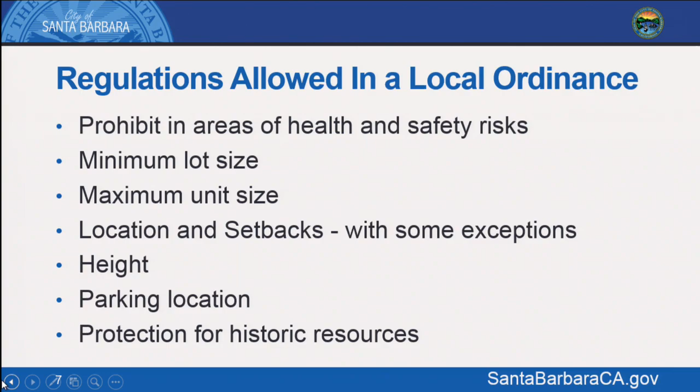Table 2 in your memo lists some of the provisions we're considering at this time for the draft ordinance. Like I said, it's still a draft. These are things we're considering as staff and getting public input on, and eventually we'll come up with a recommendation for the Planning Commission.

As I mentioned earlier, the high fire hazard area prohibition is supported by housing element policy, so that's one of the things we're considering. We're also looking at maybe a prohibition on building sites with slopes of 30% or greater, although most of those are already in the high fire hazard area.

We're proposing a minimum lot size of 5,000 square feet and a maximum unit size of 600 square feet. We're taking input on that and are open to other sizes. We're also recommending that accessory dwelling units count towards the maximum FAR on a lot.

As far as location goes, we're considering prohibiting detached ADUs in the front yard, except when it's a conversion of, say, an existing legally permitted garage. Setbacks of the unit would comply with existing setback standards.

For parking, we're considering prohibiting uncovered parking in the front setback and front yard unless it's adequately screened. For protection of historic resources, we're researching what types of resources can be considered, whether designated landmarks, something on the potential resources list, or a historic or landmark district. We still need input on that from legal staff, but that's one of the things we're looking into.

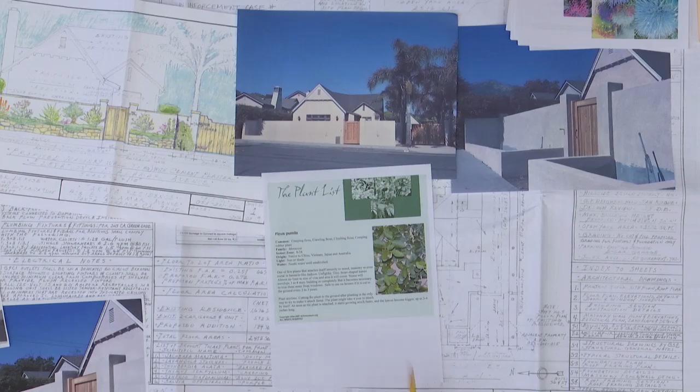Okay, and then just to be clear, is this hedge at 8 feet or 12 feet? About 9 feet, okay, and then 2 feet wider. The hedge law allows it to go to 12 with approval from staff to go above 8.

Okay, Brian, just so we hear your side of the story. When Denise was reviewing it, she felt pretty strongly, and I agreed with her at the time, that it probably was a good idea to cut it down because it was an unusual situation. But that was the feeling of our board, so she's come before the full board, and she'd like to hear the full board's comment about that.

Is there a wall behind it, a new wall that's supporting the end of this wall? Further back here, is there a fence or wall? There is a new wall that this wall is supported by. I guess I don't understand what you're saying, going this way. Yes, it's a fence there, not a wall.

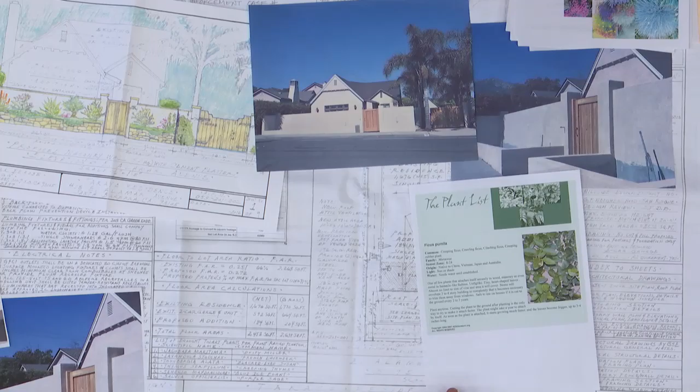Right, okay. All right, before we get too far along, is there anyone in the audience wishing to address this project? Seeing none, Chair will close public comment and bring it back to the board for final discussion.

Who has comments? If you are going to go with a vine option, I would choose the Ficus pumila.

And I disagree. I don't think the wall should be cut down. And I'd support leaving it with the screening. Any other comments? I think the wall...

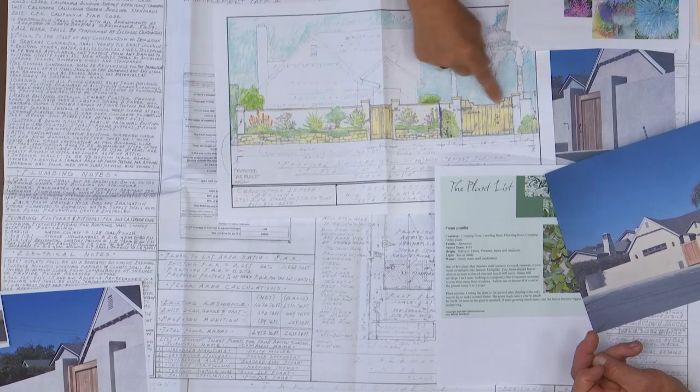One way, I could accept the wall if it was totally screened, but this picture makes it look like it's stopped. It's not finished yet, but it's going to be. Nothing in the plans, right? The whole violation and trying to overturn the violation stopped the project, because I wanted to make sure we knew what we were doing there before we started planting and filling it. But it will be filled, and I'm happy to do a vine if that's what you're asking.

Yeah, I'm on the fence, I haven't stepped over yet. I won't step over. Just so you know, the two houses facing me have huge hedges too, so nobody even looks at me. Okay, any other comments?

I'd like to see it screened. I'd like to see it screened if it stays.

Mr. Chair, I forgot to mention that the actual gates were slightly constructed differently than the approved plans. They were more decorative instead of straight across. So that would be something you would also weigh in on, whether that's an acceptable change, the way they were simplified versus the plans. There's still a double gate, plans to put the cap on, I believe. Yeah.

So what's missing is the treatment on the gates, the way they were shown. There's a cap going on that hasn't been done yet. Once that's done, it's going to be softer and look better when it's all planted, but I just didn't do any more once I had this going on.

I grew up two blocks from here, and all those houses are changing drastically, all the way down the street. Most of Alomar's are hedges, but it's changing, and there's only one house that's still there that hasn't changed at all.

Kind of an Alomar question, and Cuesta del Sol. Richard, or Robert, excuse me - it looks like in your drawing of the front of the building, you're showing a stone finish on the lower wall. Is that going to be finished that way? Yes, with fascia - it's going to be like veneer.

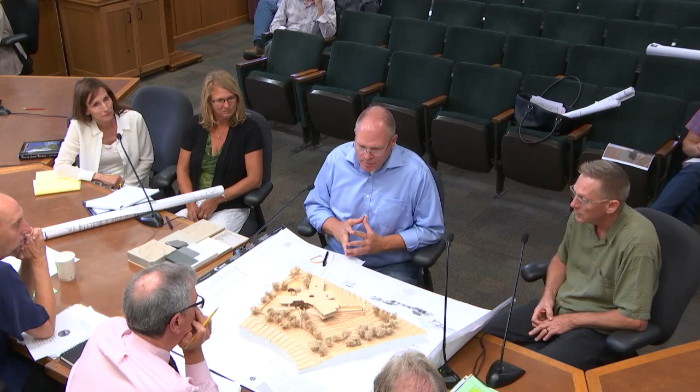The statistics, the project, and the design—maybe we could bring the model out first. This is the model that we showed you the first time, and in large part it's exactly the way we showed you last time. That doesn't always happen, but in this case we did a lot of preliminary work to make sure we were on the right track, and that paid off. I think we'll show you we're pretty close to where we were with the original project.

The FAR was listed as 168. It's actually 164. We haven't increased the floor area—the first floor level is the same as last time, the part that you can really see. The basement has increased about, I think, 150 square feet, and that was working with the structural engineer, who wanted to align some walls that we didn't have aligned previously. But that increase isn't really visible; it's beneath the grade. Maybe we'll start going through the plans.

Am I going at the right pace? Yeah, keep going. These plans are a little large. That's what I tried to avoid, just couldn't.

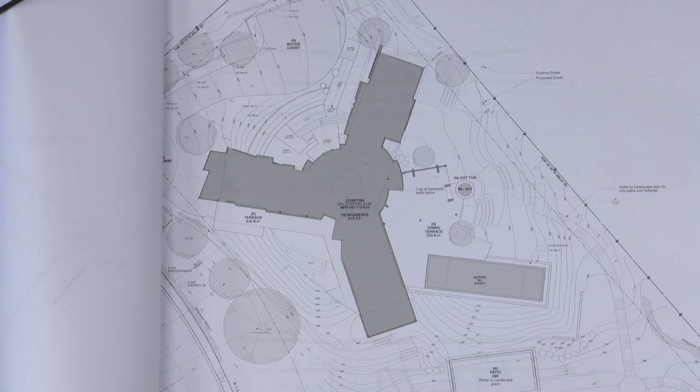Probably the most significant change to the architectural proposal was the grading. What we had before was balanced grading of, I think, 2,104 cubic yards. Since that time, we've met in more detail with the fire department, working with them to create a safer driveway grade than what is existing out there now. We were required to do more grading in this area, so the grading has increased due to that. Also, our original fill calculations were a little reduced when we had the civil engineer really look at it closely.

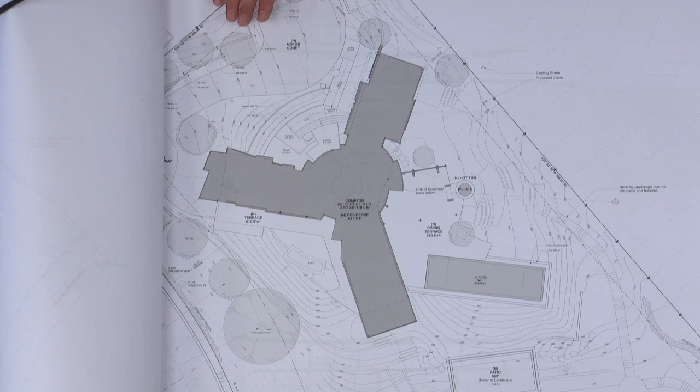So right now, whereas before we were balanced on site, now we're proposing to export an excess of cut of 1,488 cubic yards. We can also work to put more of that on the site, but our concern is if we keep putting on the site, we're actually changing the natural contours and making some slopes steeper than they are naturally.

So our feeling is it's better to export, since we've got a nice balance here now. That's that. The building heights are well below the required maximum height, with the exception of just a couple of areas at one end, where the floor below is exposed at the garage and at the workshop.

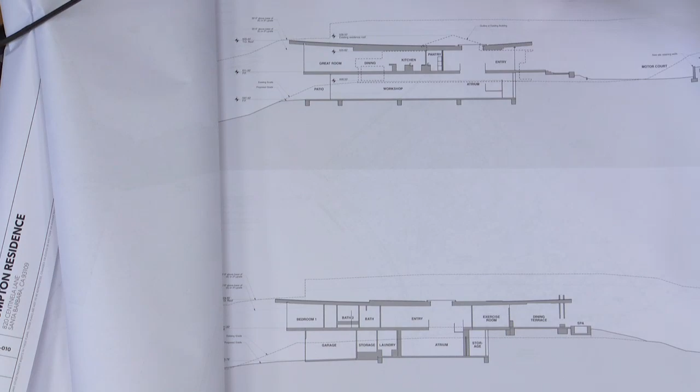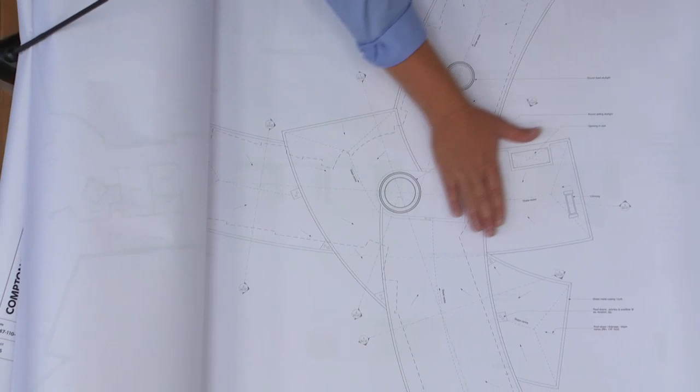In working with the structural engineer, we increased the height of the roof a foot in these areas. Going to the roof plan: the building has roofs that curve up on the ends, and these ends increased by a foot. This roof facing east, which isn't visible from the street or anywhere, we increased 2 feet because when we modeled it in the computer, it was blocking some views of the mountains and the city. But in general, we're very close to where we were last time with the roof heights.

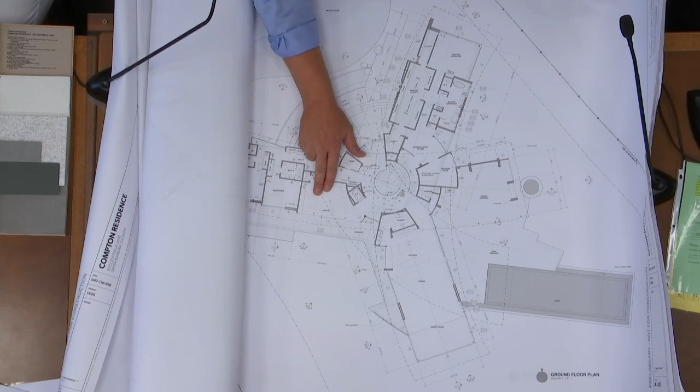The floor plan hasn't changed. The one change we made is before there was a third bedroom here, and we ended up making the office a little larger and taking that bedroom out. But other than that, it's basically the same plan, with a living wing to the south, a master bedroom wing to the east, and the office bedroom wing to the west.

And then the elevations. The materials we're proposing are consistent with what we talked about last time, now with actual samples here. The exterior palette is pretty simple: stone, plaster, and glass. For the stone, we're using a natural tan-colored limestone that's similar in color to sandstone.

We're exploring different textures and finishes, including a more rustic natural texture surface, a raked texture, and then more of a honed finish, but it's all natural stone. Right now we're indicating the stone on the elevations.

We're thinking the base of the building, for the portions exposed on the lower floor, would likely have more of a rustic finish, whereas the walls up above would have more of a refined finish, but we're exploring different ideas. Basically this material. The eaves of the roof are basically the same material as the ceiling.

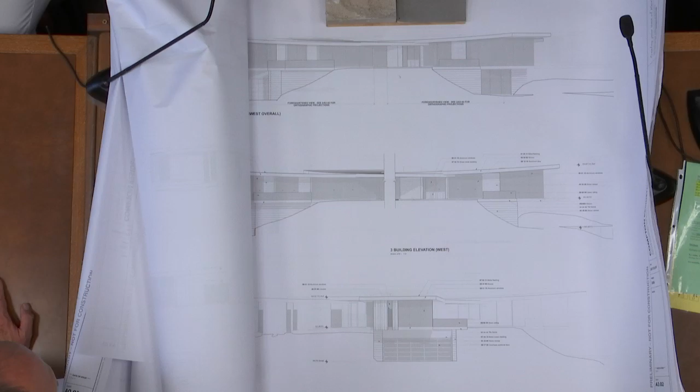So the ceiling comes horizontally and then returns up the eaves, and then we'll have a very minimal metal roof edge, this zinc metal color. We'll also use this zinc metal material for the metal walls, and what we're proposing is a vertical varied pattern. Then for the doors and windows, using a darker gray.

And for the site walls along the driveway, using a darker gray plaster color, which we think will help them visually recede and also provide a nice backdrop for Stacy's landscape. And then the decks, the floor surfaces, would be this white gray color granite.

I just realized two things: one, for the infinity pool edge, which has to be underwater, we're going to use this bluestone limestone, which is a dark gray that matches the color of the metal. And we forgot to put the roofing material on here, but it would be a gray color similar to these, and a cool roof.

Yeah, these are the elevations here, which are very similar to what we had shown you last time.

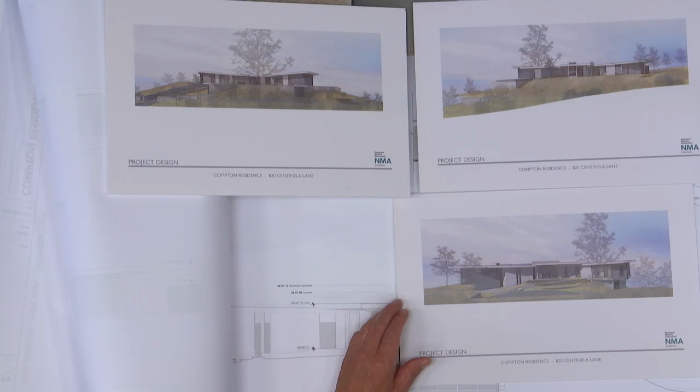Grab the existing ones we showed last time. So last time around, this is what we had. What about the plate heights? Let me go to the sections and I'll show you. Let's see those first. That's the original north elevation, so that's that elevation. Okay, back to the sections.

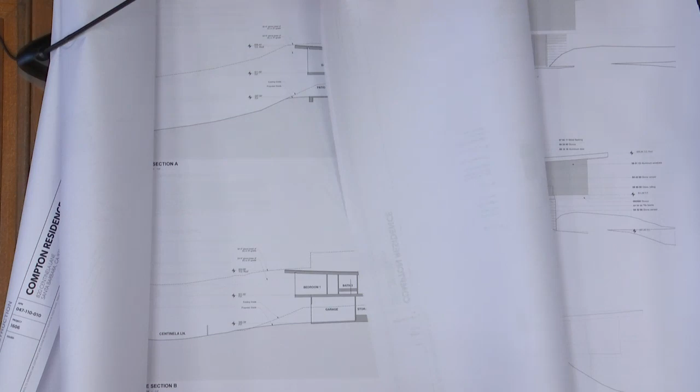These are the heights. I guess if you want to see plate heights, they're probably on the sections. Yeah, I think we should just have proper roof labels for the plate heights. Okay, these ones actually show you better what the heights are. So here we're at 11.6. At the end of the great room, we're at 13. So your workshop is 12 feet high in plate height.

Okay, anything else you need to present? Landscape plan. One question, just a quick one.

Where's the front door? I know I looked at this before and seconded it, but it's easy to lose in the model. Show me on the floor plan, and where the pool is compared to it. Pool is here, the motor court is here, and this is the entry here. We're looking at a front pathway that ramps up. Front door is right here.

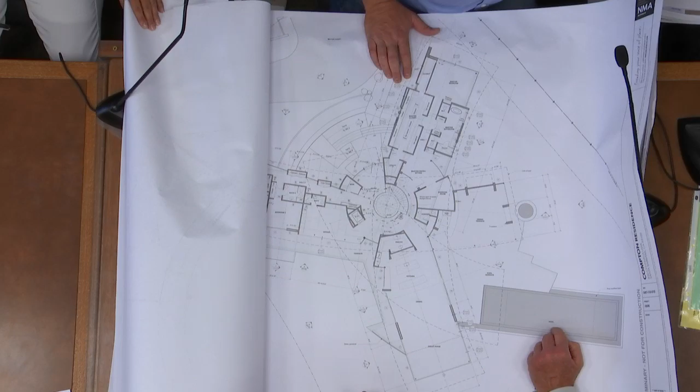Is this the living room wing? No, here - that's the master bedroom. And this is the roof that we increased by 2 feet here, where it bends out to push the fireplace out. Yeah, this model hasn't been updated to the new plans - this is what we originally showed you.

Thank you. Okay, landscape plan.

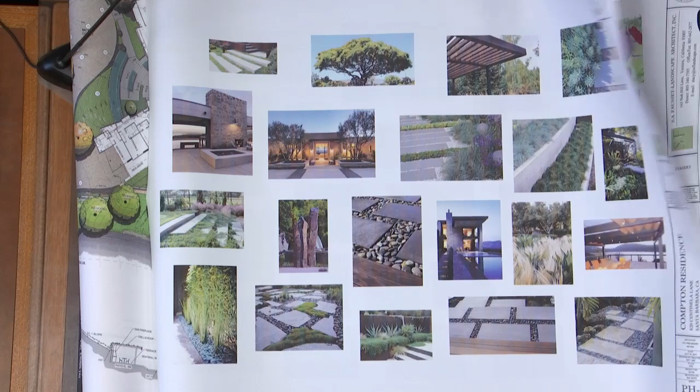A combination of stone, pebbles, other types of rock, simple landscape combinations of plantings, some vertical stone elements possibly for accent, and a plant palette using natives and drought-tolerant plant material, being sensitive to the water situation, obviously.

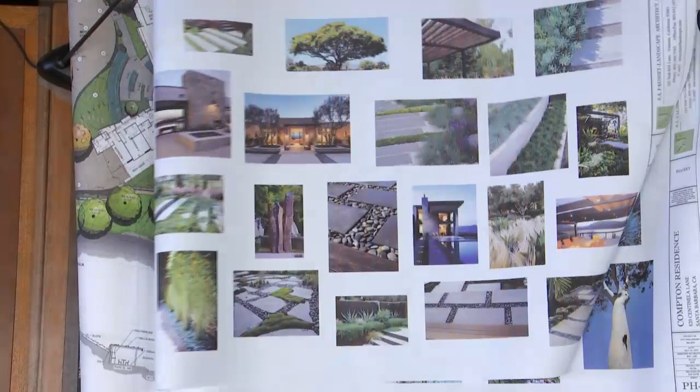There's an existing eucalyptus tree that's prominent on the site - there it is. We're not adding the eucalyptus tree. There are several oak trees on the site that we're going to relocate, and we have an arborist letter submitted for viability, as well as 4 mature olive trees that will also be relocated.

This is the driveway coming up, the motor court at this area. The existing oak trees are located here and here currently. They're fairly young and viable, so we're going to move them to this location. There's an existing city building up in this area that's not very attractive, so we'll use them for screening that a bit, as well as some native plantings along the property line there.

Coming up to the motor court here, some sweeping walls - this blue color indicates more of a grass or succulent planting used in mass, so it's more simplistic. These 3 trees would be sculptural type trees.

We're considering sycamores, a Tipuana tipu tree that's more sculptural, and Melaleuca has also come up, as have olive trees, but that's probably on the fringe because of its messiness. Melaleuca is on the OK tree list - the list of trees has changed over the years, I know. With Melaleuca, which one - quinquenervia or linarifolia? Either one of those?

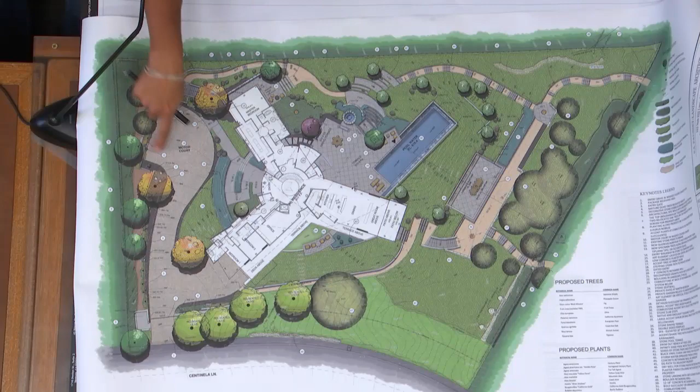Accent tree at the entry here. We have a more private entrance to the property used for circulating around the property and/or maintenance, so there's a gated area at this location, more of a DG with stone step walkways coming down here.

There's a private master bedroom patio off the master bedroom, with views out in this direction as well as all these directions. So more of a private garden in this location that relates to the master bedroom. Off the main terrace, there's the infinity pool - we're able to minimize the grading in this area.

Spa at this location - we're probably going to change this to more of a square spa that steps down and gets more naturalistic as it moves away from the house in these areas. Walking down in this direction, there's views out this way - not a lot of trees because we don't want to block the great views from the property.

So DG gravel material down into this area. We've tucked a covered patio in here, probably with a trellis of some sort that'll have vines and/or awning type shading provided. It's tucked back into the hillside at this location, but there's great views out this direction and this direction.

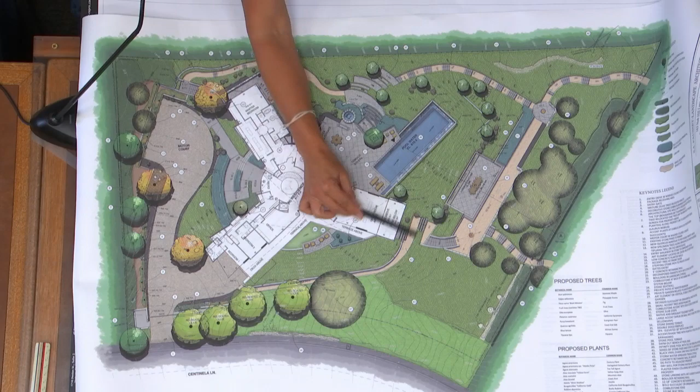Up at the house level, there's a great sunset view from here, so a tiny little patch of lawn at this area with a sunset patio, and then a pathway that circulates back, mostly for utility purposes and circulation.

All of this is more just slope planting and naturalistic. A few of these little elements are for stormwater retention on site that we've been working with the civil engineer on. So the equipment's tucked down.

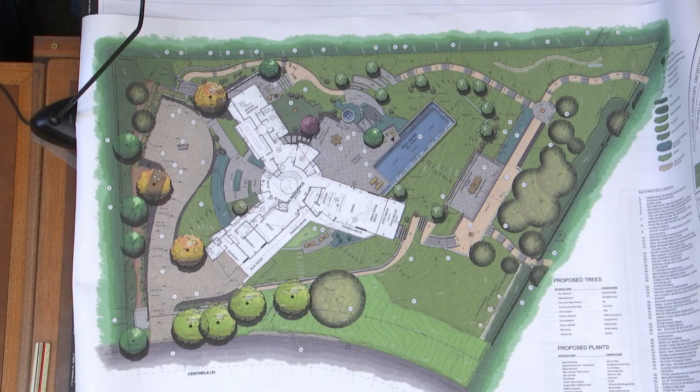Anything else? That's it. There's a little section down there that shows where this sits. The ocean's out here, okay. Oh, and the preliminary plant list is on here.

Before we go to questions and comments from the board, is there anyone in the audience wishing to address this project? Seeing no one come forward, the chair will close public comment and bring it back to the board for questions.

Fred, I have a question. You helped design this building, right, that we're sitting in? My question is, do you know what the plate height of this room is? Plate height of this room is 12 feet. Thank you.

Other questions? Questions for landscaping? Can I ask those right now? Sure.

I'm curious about the Acer palmatum. You've got this drought-tolerant, native-ish landscape going, and I don't see where that would fit in. We like the sculptural quality and the contrast. Another option is the Cercis canadensis, which has the purple leaf. But you can see this dashed line here is the overhang, that sweeping roof, so it would be in full shade here. So we were just toying between the two, liking the sculptural quality of the Acer, but understanding that it might be better suited as a Cercis.

Okay, other questions? No, not right now. I have just a few. One of the comments we made last time was the lighthouse effect of all the glass. Did you address that, or did I miss that? Yes, I'm glad you brought that up. I forgot to mention that.

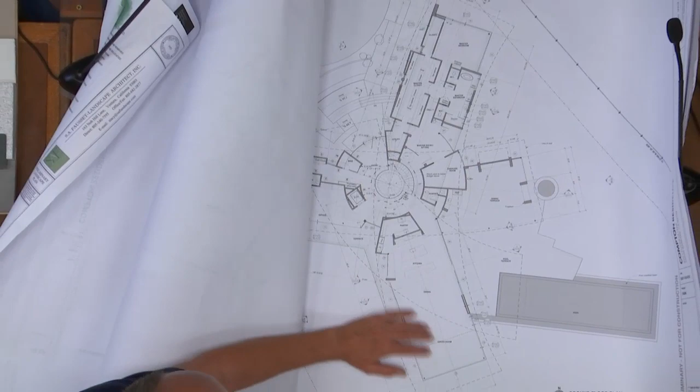But the other comment too, if you look at your floor plan, I don't know, there is an opportunity, and I'm speaking in the spirit of Bernie, there could be a little bit of reduction too. I think some of the square footage is extremely large. If you wanted to lower your FAR, but that's my comment. The rest of the board members may feel otherwise, but I think there can be a little reduction. These are very large rooms.

And it's with these styled homes. Yes, people are not neutral about the style—they either really love it or they hate it. I usually find out at Christmas parties. But just information for you to take into account while developing the design work: I think the big issue for this one is the amount of cut and fill, especially the cut. Fred has a very valid concern with regard to that. So those are my comments.

Playing off what Brian said, I think it's really important in this project and all the others you'll be reviewing to relate it to the guidelines. Your comments and questions should be geared towards how the project complies with our guidelines, and it also helps direct the applicant on how they can move forward. If you can keep that in mind, thank you. I don't like it, but it meets my guidelines.

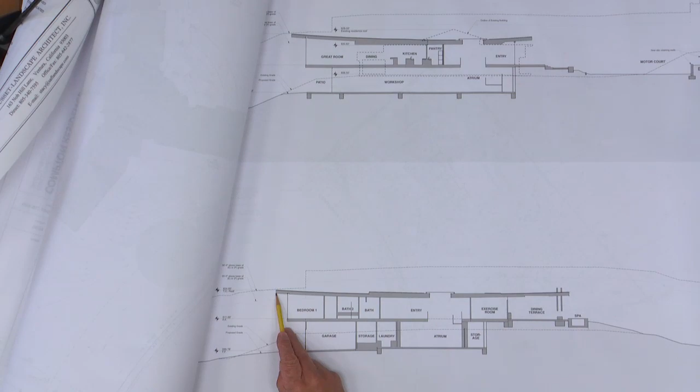So this went from about 12 inches to 16, 18 inches? 20 inches. So it gives the illusion of more of a slope up then? No, actually the opposite now—we've flattened it, but it's gotten thicker because of the structure. Structurally, it had to get thicker rather than a thinner profile.

May I briefly respond to some of the comments? First of all, I hear you loud and clear on the grading, and we'll focus on that. To be honest, it was a little bit of a surprise, but grading is notoriously hard to calculate anyway, especially with the fire department involved. So what I'm hearing is we really need to go back to the drawing board and balance size and site and reduce the grading—we'll take a hard look at that. Great.

Design-wise, I serve on the Montecito Board of Architectural Review. I've gone to—same there, Christmas parties. Believe you me, when you're doing something unique like this, if I've done 10 of these I could just say, well, go look at the other one. But we haven't—it's very unique. And so people do get concerned about that.

From my perspective, I think we've been very sensitive to the site. Although this is a site where you can see it, it's mostly from a distance. The building itself appears, for all intents and purposes, as a single-story structure. We have a lot of landscape screening, and it's not really directly viewed from the neighborhood. So I feel like we've done a good job with the mass, bulk, and scale.

Also, I think sometimes when people see curved roofs, they think 'wedge' or 'flying saucer.' But I really think this is a very subtle curve, and it doesn't have that feeling. From ground level, it's really going to appear to just be a very gentle curve. So I wouldn't want you to think this is exaggerated—I know there are butterfly roofs and things that are really an exaggerated architectural statement. That's not our intent at all on this project.

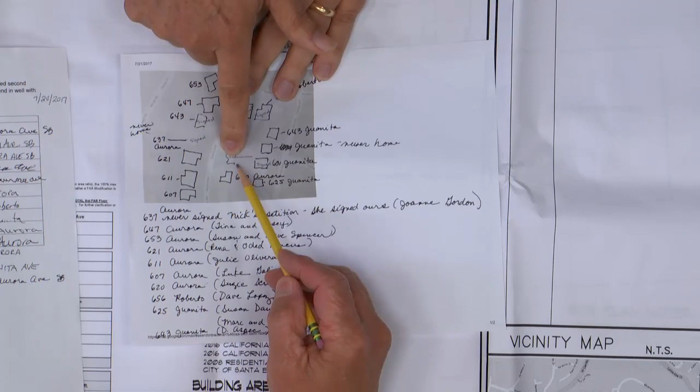So that's these guys that have addresses? Yeah, this is the site, right? So that resident, yes or no? Yes, because that's the applicant. This house above it? No, the one above it is the one that's probably going to be here to speak. And the one at the corner? Yes. And the one below it? Yes. And then all these were yes? Yeah. Okay, thank you.

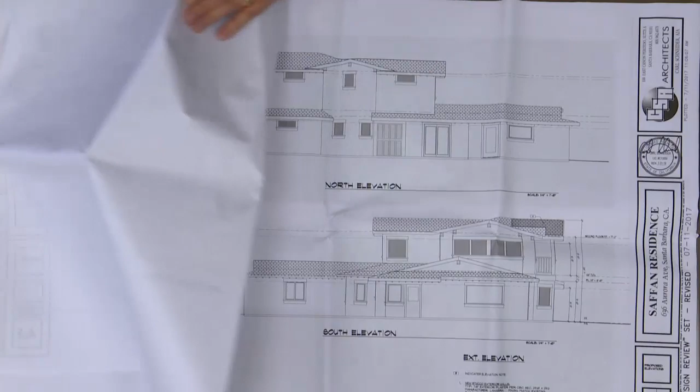And then I'll do that first, I guess. So we talked about the east elevation, I don't have the previous one. This deck is new, because that was a change, one of the changes. So east elevation, and I believe the north elevation, which originally was all one roof, all one plane, so we popped this out slightly, pushed and shoved some things to kind of break that elevation up.

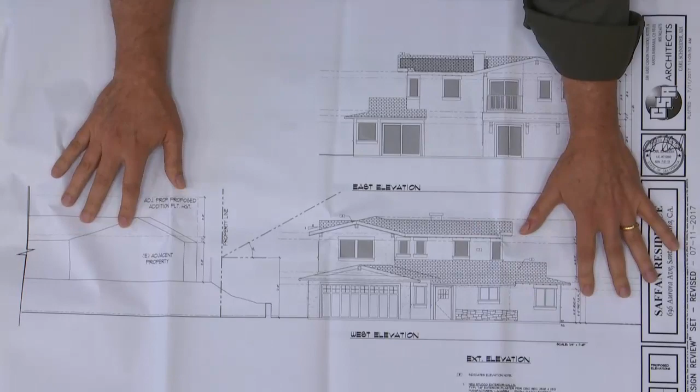That we can look at in floor plan. And then this is just a section to show you relative to what the uphill neighbor's going to see or not see.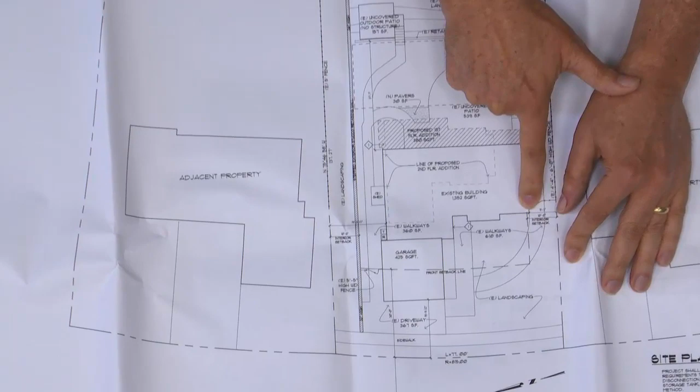Okay, can I look at the second one?

Right, so from a massing standpoint on site, we've tried to pull back to here, keeping soft to the street, soft to the downhill side. And there we have it. Okay, thank you. And that's it for right now.

Okay, so before we go to questions and comments from the board, this is still here for comments because you have not gone to the staff hearing officer yet? Correct, it's not scheduled. Because you need positive comments from us first, correct? Okay, correct.

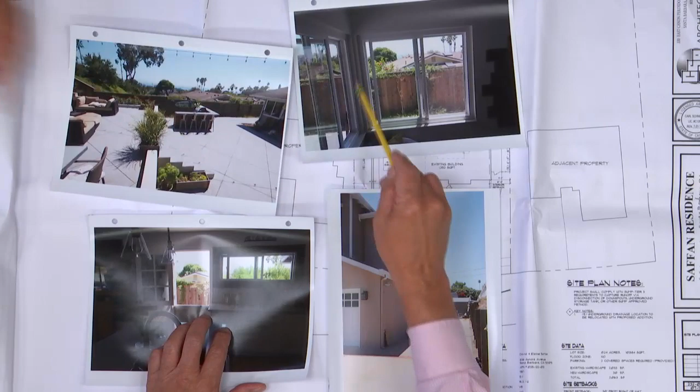Before you leave, though, I want to clearly understand what I'm looking at. So this is from your yard down into the house, correct? So that set of windows is this set of windows here, correct? This is the side, right? Yeah, so I look out the side. Okay, so that window is this window? Yes. So I have two windows that face south. Okay, and then this window is further that way? Yeah. Okay, and where is this taken?

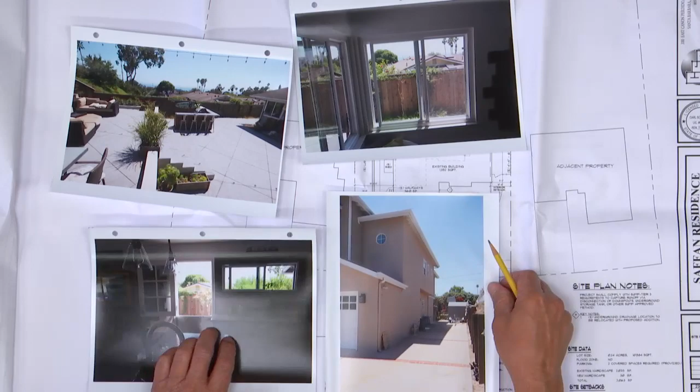Sorry, this is actually what's concerning the neighborhood, because this is another plan that CSA Architecture did that's across the street. This is the house directly across the street, and I think we're concerned that right now it looks somewhat similar to this. Okay, thank you, I just want to make sure we understand where the photographs are taken from.

Okay, next speaker is Joan Coyle. Welcome. Hi. I live at the top of the hill, and we have this beautiful view down the backyard to the ocean.

And we paid a lot of extra money for the view lot. This house is going to block about 50% of the view, not only for my house, but for the houses along the top of Roberto and along Juanita. It will also block—because there's no view this way to the ocean, it's all houses—so the only view we have is down this back swale, and it's a lot of trees, and the ocean is gorgeous.

I think that this does not comply with 3 of those compatibility analysis things. It's really a public view of the ocean. Also, they have a very large front yard. If they would move it forward towards the street instead of into the backyard, that would be avoided. But it wouldn't bother anybody's view, because that's where all the buildings are. And also, all of the houses in that area are 1 story, except for the 2 that they showed with their plan.

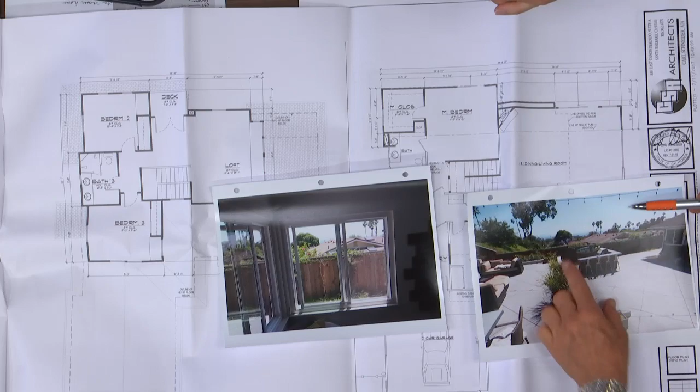And what we're really looking at is a view that we don't know what kind of trees these are, if these are street trees, if they get pruned regularly, and palms are just going to go up and continue to make sticks. That tree you're looking at over there is Susie's tree. It's an olive tree.

Okay, well, let's stop right there. That's not on our property. I made a comment. I want to keep this to questions from the board. Okay, the way this works is we're going to have questions from the board, then we're going to have comments. Then I'll allow the applicant to respond, so make notes of what you'd like to say. Otherwise we're going to get into crosstalk and we don't get anywhere fast.

So you're asking the landscape colleagues your question: don't you think the trees are going to grow up? And I've had questions on what the species is, what the max height is, if the owners prune them, if they're city trees, if the city prunes them. I agree with Lisa - it does depend on the tree and how people choose to maintain their trees, and who knows if those trees are going to be there forever. Somebody might choose to eliminate a pine tree, or it might die one day from pine pitch canker.

I own houses on the Riviera and I own houses downtown and out north of town. Trees just get bigger and bigger. Sometimes neighbors do not prune the top of their trees - they let them grow, and the Riviera has lost views. I mean, at one time there were no trees on that Riviera.

Go ahead and finish your point. Okay, can I make another comment? What we're thinking about here is the fact that some of the neighbors don't want to look at the side of a second-story house rather than blocking their view, because they don't really have - they're looking at a roof here rather than a second-story wall. We asked him to set it back, make it look more interesting instead of having a sheer two-story wall, and he has done this. I'm just making some comments.

So one of the questions I have is about that window right there - what elevation is that? That's the window. Okay, yep. So in theory, that's above a headboard. Correct. Okay, and same thing here - that window's high? And that window's high, okay.

In relationship - one of the things, and Brian, I don't know if you did because I was not here - can you fill me in on whether we conveyed the fact that we're not allowed to guarantee people's private views? My emphasis was that they had a right to build a second story.

It was one of those situations where it's one of these old developments where it's step down, they're all single-story homes, and now they're building second stories. They have a right to the second story, but I emphasize that they visit their neighbors and work it out. I'm trying to get to the site plan. This was Bill and Lucille.

So in relationship to this second floor, is that window we were just talking about right there? More or less. And the window he's showing us in the photograph, in that corner, is in that corner and this corner. Correct. And there's another window which appears to be like over a kitchen sink or something, is right here.

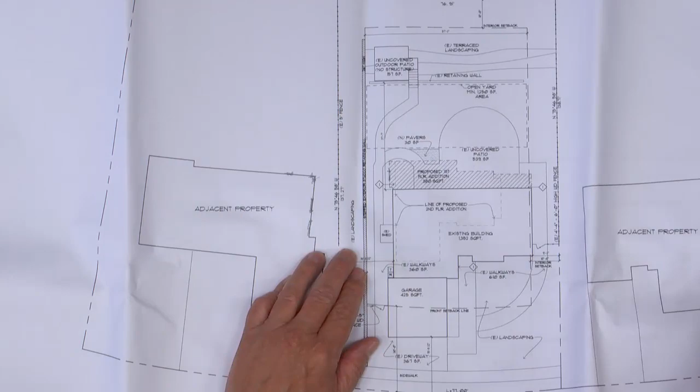And otherwise, out here in the yard, he's looking down, this thing isn't blocking anything. So from his patio, this whole photograph from his patio and his outdoor bar and all that stuff, he's still got an ocean view. Maybe he doesn't have that little piece of ocean view. Okay, so we have this, and then...

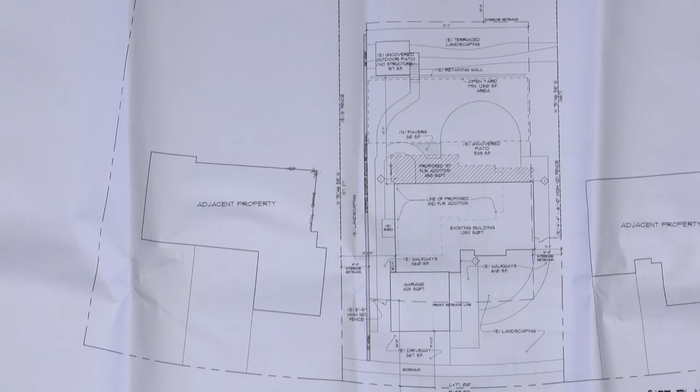The purpose of sitting, this sits over new foundation and new footings, correct? Correct. Second floor, so this is relying on the walls below, correct? What about, that wall, is it relying on a wall below? No, that's kind of up in there. Okay, so this is kind of relying on whatever you structurally have to do to make this all fly. Right. Okay, let's see if I have another question.

And landscaping is basically staying pretty much the same, correct? Correct, because they've just redone it over the last 2 years. And then I noticed that there was a comment about solar panels or something.

One of the things this board has very little say about is solar panels, because it's a state law, so we're fairly limited. But I don't see where you have an exposure to actually put them, if you wanted to, right? Well, by code, we have to, quote, allow for their use someplace. So is that what you're showing? That's what this is. But that's not exactly where they should be, it's not south orientation. Right, but they won't be the most efficient location.

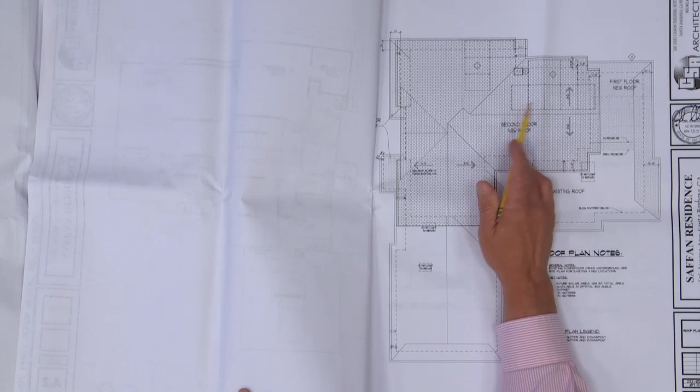Okay, but you have shown them. All right, just so everyone understands, the state of California says any homeowner has the right to put solar panels on the roof, and this board has very little say about where they go or what they look like. We can kind of dictate the color of the frame and a few other things, but pretty much if a person wants to put panels on the roof, we don't have a say.

Okay, I think that's the end of my questions. So do we have any more questions? Okay, so...

You still haven't been to the staff hearing officer. I'm going to make sure I'm correct. Correct. Okay, and did we do positive or negative comments or any comments last time? Yes, on this little sliver? Not in the specific area, so no. Ultimately, the applicant is looking for those comments so they can move on to the staff hearing officer, to get a modification, et cetera. So that's kind of where we are.

Okay, so let's go to comments. There's comments. Anybody? Okay, I want to go back to the floor plan. If nobody has comments, I'm going to move ahead.

You know, I went out there and spent some time this afternoon and walked around, as I've done before, even with the previous applicant who has the home just above this, trying to understand what's going on in the neighborhood. And it's not just the two houses across the street, there's actually a house at the corner that's 2 stories lower down. And as everybody's pointed out, most all of these homes are going to get to 2 floors at some point. We even have an applicant next door that, if he's lucky, will find a way to get that built. So we're going to have to deal with second floors and so forth and so on.

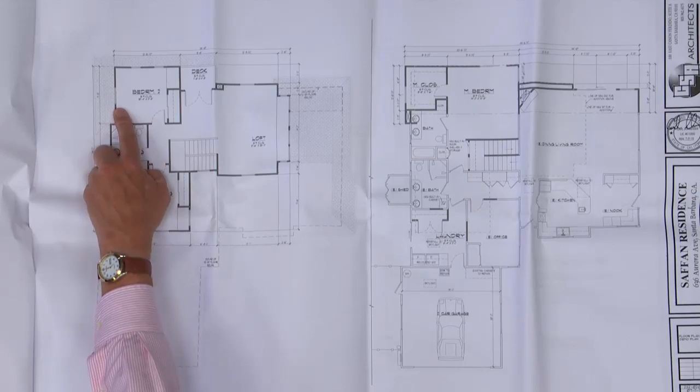So the struggle I have is the privacy issues. And I think to some degree you've solved that by keeping this window high here. That probably at least deals with being able to look in each other's windows. I'm just wondering if you were to make a move here that might get us a little closer and still do exactly what you're trying to do, if you were able to shift this plan.

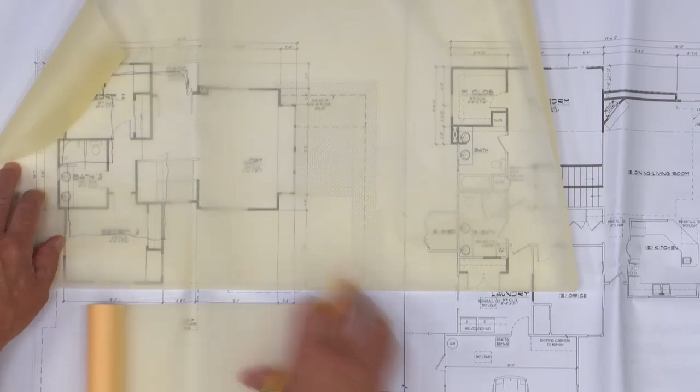See if I can do this. Shift this plan so that—oops, used the paper incorrectly. Shift that plan so that goes like here, and get you a deck here, and moves this other bedroom down here.

That's why I was asking what you're relying on to get all the structure done, to get these bedrooms moved around. You're going to end up with a little hallway here, I think, to get that to work. But that would give a real relief to the relationship it has with the corner over there of the other house.

Not that we're protecting the view or getting the view taken care of at that corner, but it does move the mass back a little bit—it moves the second floor mass back a little bit towards the street. You still got the first floor that you still have there, but maybe the deck goes like that, or maybe the deck goes like this, or whatever.

But it moves this back a little bit. It makes this bedroom maybe get some windows looking down the ocean at this corner, and this bedroom over here gets a little different arrangement.

Well, I would argue that bedroom forces this bedroom to have its primary view towards his house, where right now we don't have that. This is the primary view, and that's the primary view.

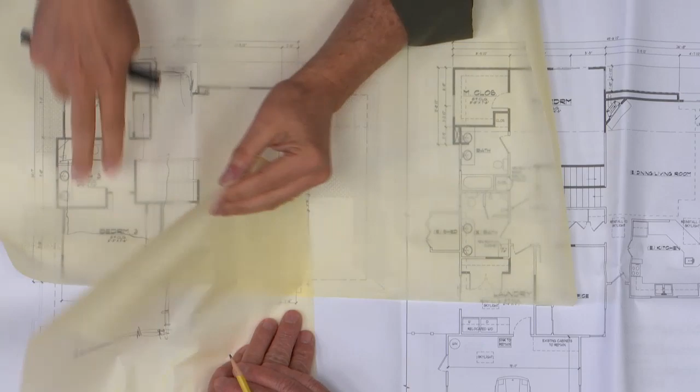And in theory, we could literally eliminate these windows if we wanted to at the moment.

So if there's a trade-off you're giving up—yeah, I understand. Those windows were added to make it more interesting. They were not in the original plan. I understand. So I'm just playing with the massing right now.

Just seeing if somehow we could relieve the massing a little bit and push part of the second floor more towards the front yard where their garage is, which may have windows—I couldn't tell whether it has windows or not. So that's just a thought, as maybe a little way to change the configuration just slightly.

Okay, other comments? Yeah, Fred, my comment was, since you weren't here last time, to look at what you've suggested in the past of having a 7-foot plate height with dormer windows or something, just to push it down a little bit and get the whole plate line down. Yeah, just to play with the roof line.

The problem with that is that the existing roof slope, which you're matching, is already at 3 and 12. Right, but—so to do some kind of dormer—well, no, don't do the dormer.

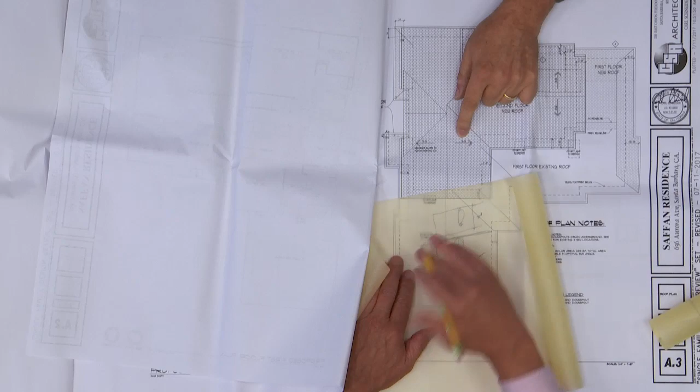One of the things we've been able to do with other homes where we've really had this height issue, with the size, scale, and bulk thing, is: first floor is 9 feet, typically 8 feet to the second floor. And what we've done is gotten these plate heights to go down to 7 feet, and you end up with an interior room that gets a vaulted ceiling. What that does is it lowers the profile by almost a whole foot, particularly with 3 and 12.

You can't really get below 3 and 12 because the code won't let you—you have to be at 3 and 12—but it does bring the whole profile of the house down. And what it really does on the street side, unlike the house you did across the street, is really bring that bulk down. We did that on a house that really helped out.

We did a house on Upper State Street, just before you get up to Constance, where we asked them to lower that down a foot on the second floor, and it made all the difference in the world as it sits between the two other existing houses.

So I'd suggest that's worth exploring. I'm not saying you have to do it, but I think it's worth exploring to get the bulk down and get some of it shifted forward. But I'll see what everyone else says. Okay, other comments? Support it.

And remember, we're only doing comments because he's still got to go. So we either have to decide comments to come back to us, or we're okay with everything and let him go to the staff hearing officer. That's kind of the two things.

Sure, I guess I'm wondering, do we actually have to get to that point? Because that's really not affecting anything else. The staff hearing officer, and I'm glad you're pointing this out, the modifications on this side, nobody seems to have a problem with that side of the house.

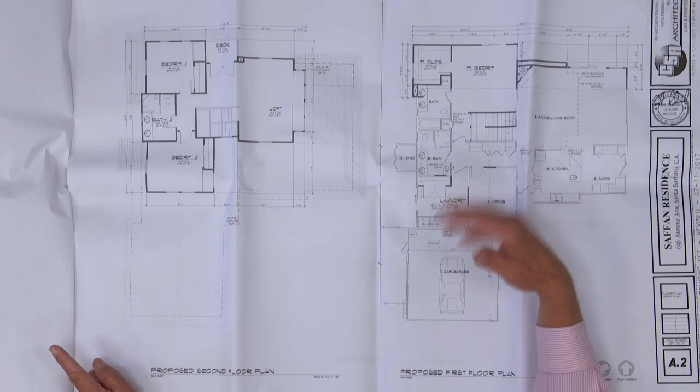Right, so we could do one of three things. One, we could say look, we want you to do all the studies and change and come back. Or we're happy just as it's presented, and you can go to the staff hearing officer and we're okay with this. Or the third option is, we'd like you to do all these other studies, but for the purposes of getting on the agenda for the staff hearing officer, which takes months, we would give him positive comments on this piece, so he could at least get that part. So there's one of three actions.

So the chair would entertain a motion. All right, I'll make a motion. You want to try it? Yeah, okay, so it's just comments?

The board will make the following comments: the board can support the modification as aesthetically appropriate and does not pose any consistency issues with the following design guidelines. The board would also like the designer to explore lowering the plate height to 7 feet, on the second floor, with a vaulted ceiling system to minimize bulk issues. The board also highly stresses that the designer and the owner meet with their neighbors and have it be an amicable design process.

Suggesting pushing the front second story element forward, explore that design possibility to minimize any view impacts with the adjacent neighbors. That's my motion. If the maker of the motion could say you were continuing it indefinitely to the staff hearing officer, correct? Yes, continue it indefinitely to staff.

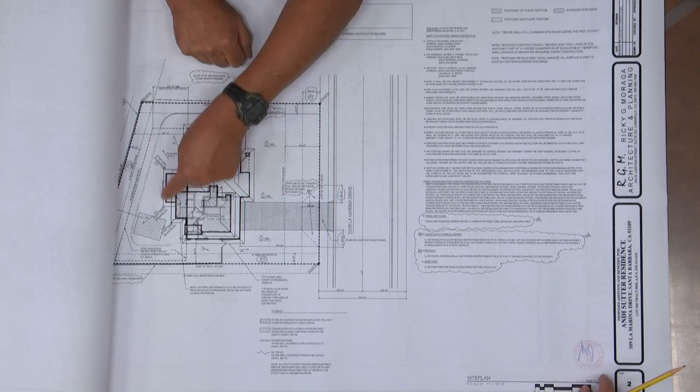This small portion here is the first floor addition underneath the master suite. That's going to be the expansion of the kitchen into the backyard. And then this represents the new covered patio at the rear of the house.

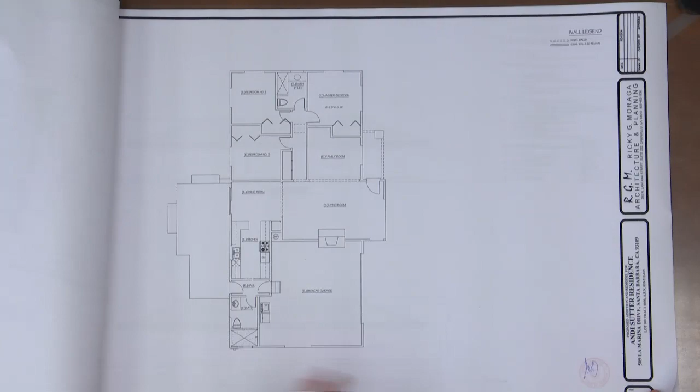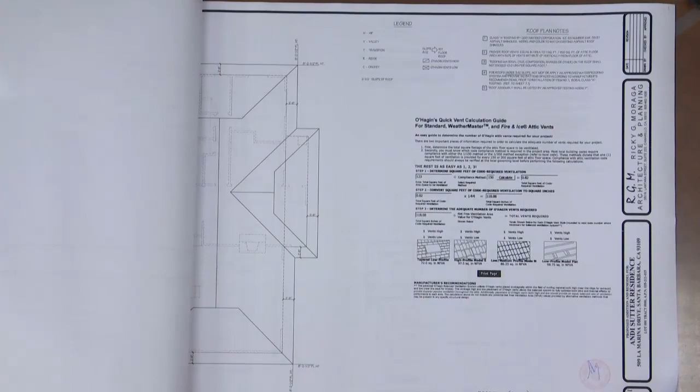So on the first floor, we're pushing out this portion only in the rear of the house and adding this covered patio over the existing. This line here is the line of the existing patio we're adding there. Then this is the garage portion of the house, and we're setting back here and here on the second floor, and then putting interior stairs.

And then upstairs, you can see the master suite. We've set back from the front and from the side. By the way, this is already 14 feet 2 inches existing, so we set back another 4 feet beyond that, so we're about 18 feet 2 inches. Overall, we put it over the garage portion of the house to try to keep the elevation down.

We tried to set with the roof of the house, which you'll see in the elevations, keeping the same look of the roof with the Dutch gable end roof. Here's a roof plan showing that we're keeping most of the lines of the first floor and then adding this small portion over the second floor on the south end of the house. We're leaving the north end of the house basically alone, which helps minimize some of the costs.

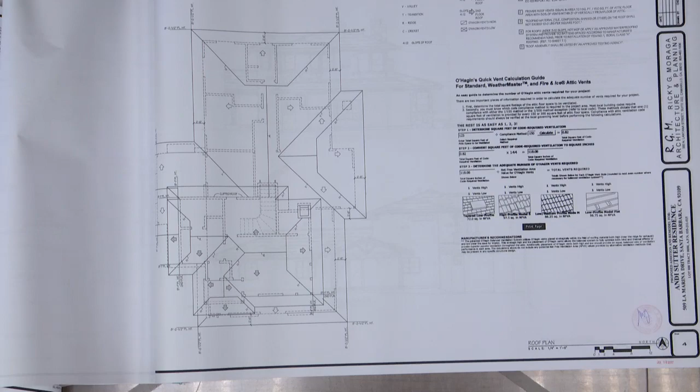This is the rear elevation showing the patio cover. This is the new first floor portion, the expanded kitchen out into the backyard. This is the south elevation. Again, this is the existing roof line, and we've come up this bit. The difference in height from this existing ridge to the new ridge is about 8 feet 3 inches.

The front elevation, we're trying to match some of the existing stone, stucco, the window looks, the shape of the roof. Same thing on the north end. Of course, this is set way back from the north end of the house, but still keeping in line with the existing that's there.

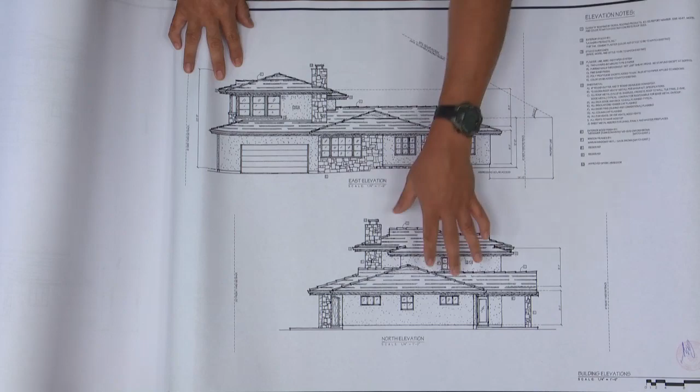Okay, anything else? I don't believe so. Okay.

Can we get those pictures back? Do you have photographs? Just the ones that we submitted. Do we have, Katie, do we have photographs? Please go to Katie. Yeah, those will go back for the other project. Okay, so perhaps you can go through these photographs, what we're looking at, please.

Sure. So this is the front of the house. Actually, the garage is at this end. So you can see the stonework here. Oh, I'm sorry, we're back one sheet. The stonework here, the shape of the roof, the Dutch end gable.

So the rear of the house is just a flat line right now. There's the existing patio there. It will be popping out over this portion of the house.

This is the south end elevation. There's just a bathroom window and a garage window. There's really nothing there.

Okay, and then these are views of the neighbors' houses. It's a neighbor across the street, neighbor south, north neighbor.

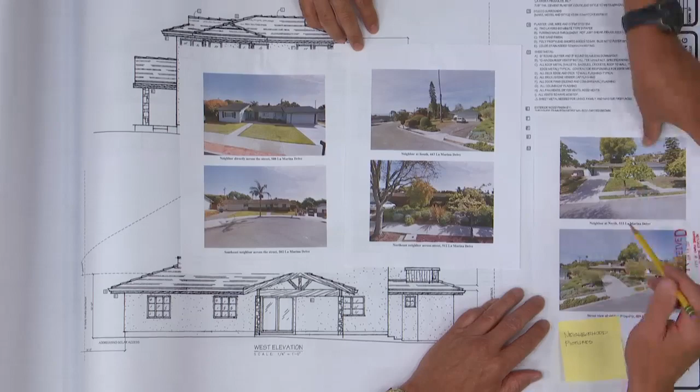This is the street view of our property. And so that house is this house? Yes. So that's above you? And is this that? Yeah. And the house on the other side is where? That's this one, I believe. That's this house. Yeah, no, that's across the street. I'm sorry, this one, on the top, on the right. Right, okay.

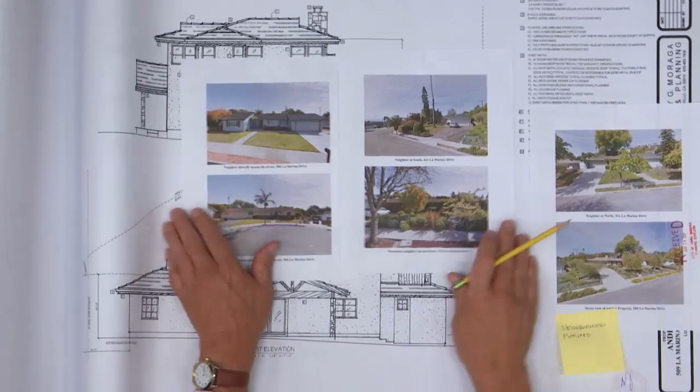So just turn around and tell me which ones work. Okay, okay. This is the neighbor to the south. Okay, all right, thank you.

Okay, anything else to present? Any landscaping? No, we're really not changing any landscaping at all.

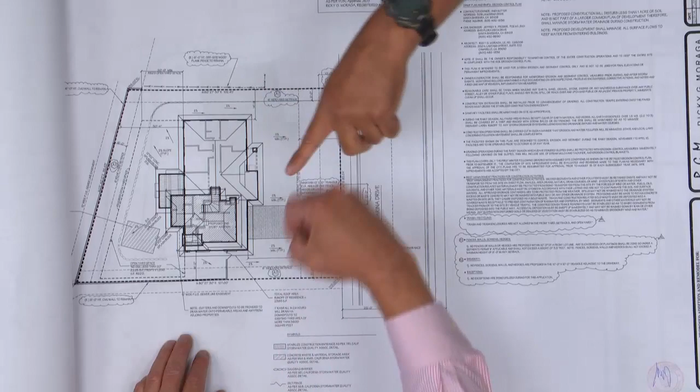So, obviously, this is the same problem you guys are facing all the time, right? It's a terraced neighborhood set up for single-story houses where everybody's got a view. So I'm obviously concerned about blocking, and it will block some of my view. I guess I would ask that the house, as much as it can, move west as much as possible to sustain some of my view. Also, I was concerned about the height of the roof. It looks like the roof's actually quite short, if it's really actually 8 feet from the ridge line of the current house.

The other problem I have is that the north-facing wall of the second story, that window - the way the terracing is, they didn't do a very good job of terracing, so the house directly north of this house is not that much higher than this current house. And the way my house is, and the way it's terraced, I can literally stand and I'm looking straight into the window of what was proposed, their north window, that second story. Yeah, it's right in the living room. It's pretty much a direct shot.

And your house is under construction right now? It is finishing under construction now.

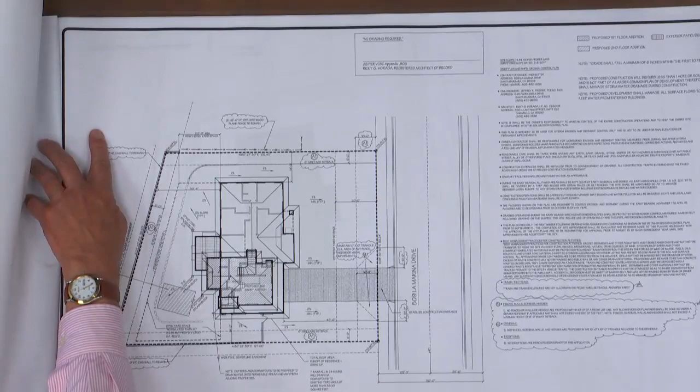I'm Elliot McDougall, owner of 535 La Marina, which is cater-corner northwest of the house. Here's a couple pictures so you can see my view - this is from the deck, and this is from the dining room, the rooftop of the house. And are you the house that appears to have a second floor? Is that what I'm looking at? It's not a second floor, the garage is raised.

There's a peak roof with glass. So the garage has a room that extends from it, but the house is set down because the hillside is so steep. Okay, gotcha, so it's not actually like a second floor, it's just built into the hill. Okay, I only observe what I can see from the street.

So echoing Paul's comment, the view is the major concern. We bought this house because of the view - that's what everybody in the neighborhood enjoys, right? It's a terraced hillside view. I think the key point is that nobody on the whole street has built a second story that blocks anybody else's view. There are only a couple second stories, and they're built into a hillside so they don't block anybody's view. This would be the first second story that blocks anybody.

We've done a ton of work in order to enjoy this view and made substantial investments. We just undergrounded all the power lines so we can see it - thousands of dollars of work. So it's not an insignificant thing to us. It has real monetary impacts, it has real enjoyment impacts, and it's out of character with the neighborhood. Nobody has blocked anyone else's view.

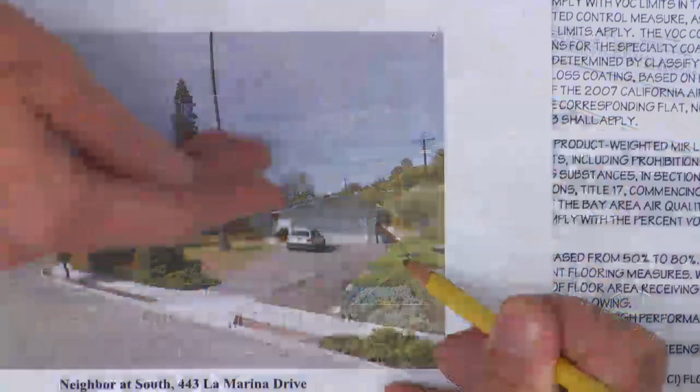So where they're gonna go up, and all those windows, those are directly down into our backyard. They're back over here, or are they over here in the driveway? No, these windows are the front part of our house. All of these windows right here look directly down into our backyard. Okay, so our house is here.

Okay, I understand. I'm blessed because my view's not going to be blocked, but I am concerned about other people's views being blocked and the precedent that we're setting in the neighborhood. So we would have an impact to our privacy. Okay, thank you, excuse me.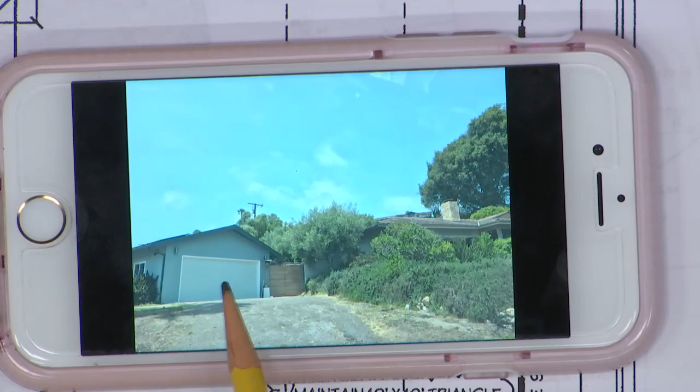And so your garage goes back maybe 20 feet? Does it have windows in your garage? There's a window on the front of it, on this side. No windows. So the first of your windows don't start till after 20 feet, more or less. Yeah. Okay, all right, thank you.

Is there a reason why you made the second floor a foot higher? It doesn't need to be. Well, two reasons. One is that we would like to have more, I mean anybody would in a house like to have more volume or more elevation, but because it's a Dutch gable and roof, you can't.

Describe a Dutch gable to me. No, finish what you were saying. Okay, because it's a Dutch gable and roof, you can't do a ridge that goes the entire length of the room and then do a typical volume like you were discussing in the last project.

Because the Dutch gable end roof stops here and it becomes a hip roof on the end. Right, so I can't take this ridge all the way to the end, put a post here with a long beam and a big high. Typically the tract houses are built like that. So instead of being able to do that, I got a little bit of elevation by having a 9 foot.

Okay, and, God, you answered both my questions, okay. I'll hold off on my comments. Okay, just questions. Any other questions? I have no questions. Anyone else have questions? No.

So you don't have on this drawing, and I think, where did the scale go? Oh, thank you. So the total height, more or less, is 24 feet? Is it on, where is it? I think it's on the other elevation. The ridge, 23.8. 23.8, okay, so that's to the ridge.

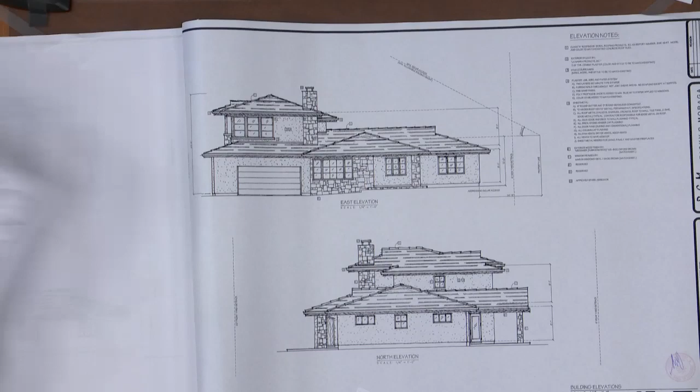This fireplace element is, and you were going through the plan, and the other thing the audience should know, we don't see these drawings ahead of the moment they're placed down in front of us, so this is the first time we've seen these drawings. So sometimes it takes a little bit of effort to understand what's going on.

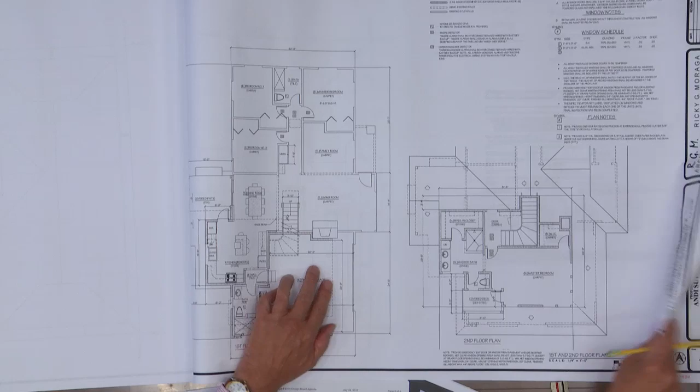So the fireplace is this fireplace. Correct, it's existing, so you're extending the chimney up. Correct. Okay, and then plate height you asked for, and you don't have sections. Okay, those answer the start of my questions.

Other comments? Comments? Yes. Questions? Okay, either way, comments now. I have comments. Go ahead, Brian. I'll let you go first, I'm probably going to say the same thing you're going to say. Go ahead. I'm really uncomfortable with the 9-foot plate height on the second story. Me too, yeah, especially, you've really got to put it at 8 foot. The other thing I was noticing, scaling the elevation, where are the exterior elevations?

The windows, the doors on the second story too, look like you have it at 7 feet. Is that the header height? A little low, the head height, yeah, I believe it's 7. Yeah, so those should be 6'8". I think for this kind of neighborhood, you've got to really bring this second story plate height down. I would make your header height 6'8" and your plate height 8 feet. And I don't know about those Dutch gables, but in this particular context of the neighborhood, I think 9 foot is too high of a plate height for this.

And that's the end of my comments. Yeah, I walked through a house that had low 8-foot ceilings, and all of a sudden you walk into the upstairs, and it really feels weird. You all of a sudden, to me, it feels weird. And I can see that, yeah. Although generally everybody that comes over doesn't walk into that.

Yeah, well, I see the pictures that we've seen of all the lots that are terraced in this area, and bringing these plate heights down would considerably change the view that everybody is being blocked by. That's your neighborhood, I'm looking at neighborhood compatibility.

You bring the plate heights down to something that's reasonable, to me that's reasonable, that matches the rest of the house, and you would give your neighbors something. I didn't say that, but.

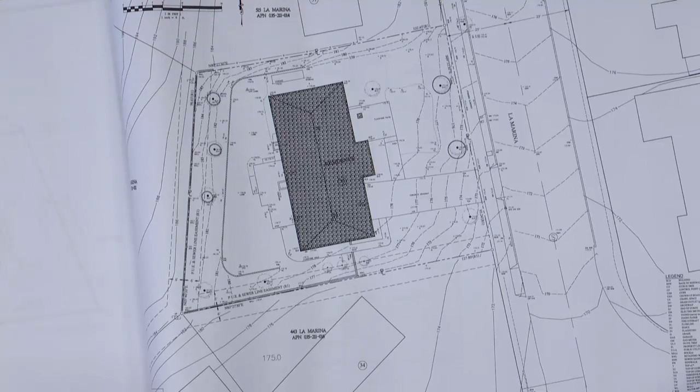Well, I see where you're headed with that, but one of the things we're trying to be sensitive to in the elevations and the view is, if you go back to the grading plan here, the homes that I think would be most impacted are set back because the second floor is in this area here. They're set back some 80, 90 feet.

No, I understand, but the elevation of the new roof is nearly about 4 inches above the elevation of their finished floor. So it's not like we're putting something up in their view, it's down here at floor level to them. And we're not putting a slab out there that's straight on to them, it's something angled to their view. So it's only about 12%.

We understand, but I think the board is going to have you move that plate height down. Okay? Well, I understand that. Now here's part of the challenge you have. You're trying to convince us that your design works, okay? Quite frankly, there's not enough information here for me to make that determination. So I'm going to give you a list of things you need to do, okay?

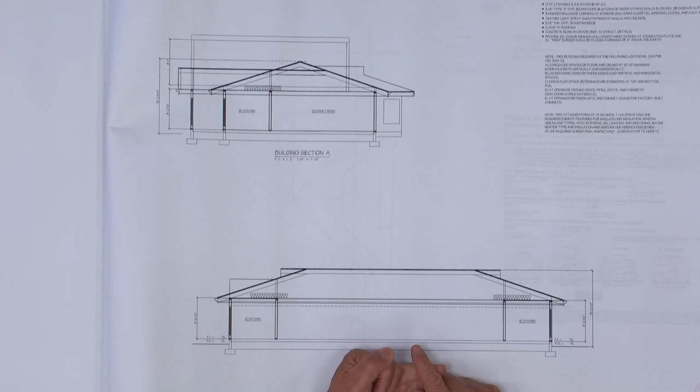You need to do a longitudinal and horizontal section through this site that relates it to the houses on each side. I need to see a plan of approximately where the window locations are on those homes. You need to come in with Google aerial photographs so we can understand where all these folks live and where their houses are in relationship to your house. That's a basic piece of information.

You certainly need to do building sections, particularly where you're trying to demonstrate that you have a plate height issue, rather than verbalizing it. I'd like to see that done by a series of sections, if that's what you're trying to sell us on.

I think that some of the proportions here need some work, particularly on this trellis element up here. I'm not convinced that really reflects what has to be done and built that way. I'm particularly concerned about what appears to be a heavy detail on this eave configuration.

So I'd like to see some idea of what you're really proposing there. Matching the existing. Okay, and we don't have any photographs to see that, so you need to give us information. You've got to sell this board that what you're proposing here is doable, and the way you do that is by giving us information to allow us to make that determination. Right now there isn't enough information, in my view, to give you what you need to have and ultimately to get what you want.

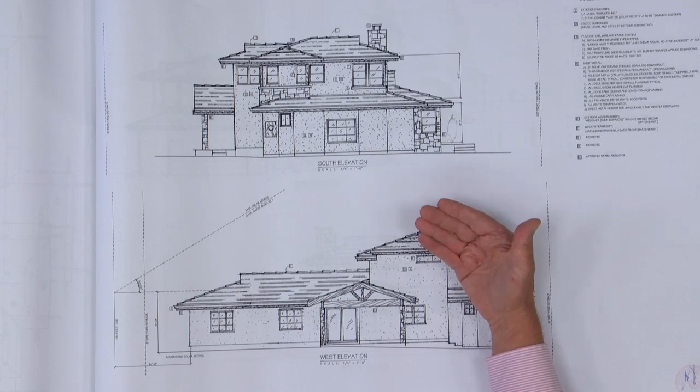So if you're trying to match the current eave situation, we need to see photographs, because even though I've gone out and seen this site, I don't have a photographic memory to hold onto, so it always helps to do that. If you can get photographs from your adjacent neighbors about what they're looking down at, that's important.

I can tell you we've seen many homes where we get complaints that it's going to block my ocean view. When we really get down to it, sometimes what we learn is yes, it's blocking, they have an ocean view this big and they're getting that much blocked. I don't know that, given the information we have sitting in front of us, and I can only see this from what I can see from the public right-of-way. So that's part of our struggle here.

The reason for the window locations is we do want to make sure that we're not impeding the privacy issue, both on your part or the neighbor's part. So having that information is going to be very helpful. I think you've got to do some more work in order to tell the story.

Okay? Other comments? What is this window, on the south elevation, in the middle of that elevation? That one right there? That's a garage window, it's existing, first floor garage window. Yeah, see, and you've got things like up here, here's the floor plan, first floor garage.

Somewhere in here, the existing garage. Yeah, here it is. So what I didn't see was that window there. And it looks like you're building on something outside of that. So is that a new wall? It's a wall that's just for the structure, to reinforce for shear. Okay, so where am I looking? That's these two elements. Correct. Okay, and this is a window. That's not a door opening, is it? No, it's a window, so that's that window right there.

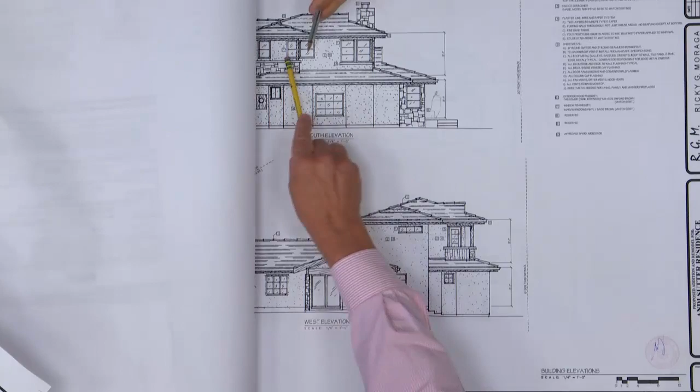And this little window, is that little window right here? Correct, yeah, this one. Okay, and then there's another window right there. Okay, all right. The way I was taught to do windows is to show something like that so I could see where windows are, so I don't get it confused with an opening. Looks like an open patio. Yeah, so that's kind of helpful.

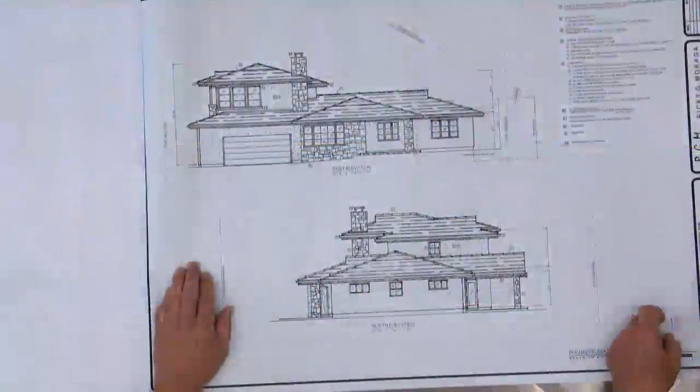Okay, and anyway, I think there's more information needed in order for at least me to give you clear direction. Where's the front elevation? Look at the front elevation. East elevation. I think the east elevation is the front elevation. That's, I guess, right. Window. Yeah, okay, and where is, so the garage is down. That's what I was getting off of. Garage is set down. Yeah. So where is this, three feet...

In relationship, where's the curb line? Is that down lower? Yeah. Okay, I think it's helpful if you get that in this drawing, so we can kind of see the relationship of this house as it sits up to that house, whatever that house is. Then we can kind of understand the context.

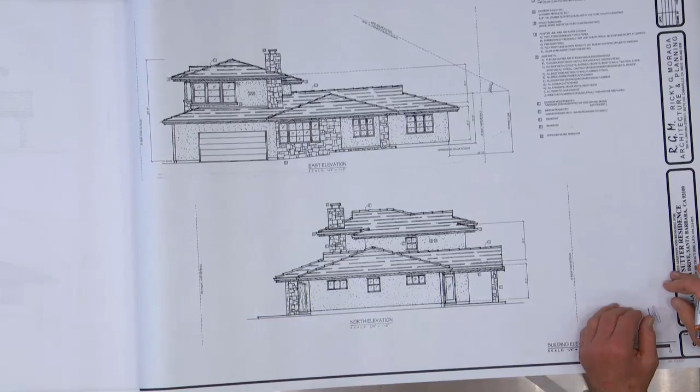If you really want to sell this, what you do is come back with a drawing, maybe at one-eighth inch scale, not one-quarter inch, that shows that house, this house, and that house, and how they all relate along the streetscape. That's what we're having to determine: streetscape and neighborhood compatibility, how this fits in with everybody else. And particularly because you're the first one, at least on this segment of the street, with a second-story proposal, that's going to go a long way to help us understand how this all fits. Okay?

All right, any other comments? Okay, the chair would then look for a motion. We've got several possible actions. You could accept it just as it is and give it project design approval, or you could make a motion with comments only and request the applicant return with additional information. There may be some other form, but those appear to be the two forms a motion might take.

I will make a motion: the board would like you to return to us with the following information, either in two weeks or indefinitely. Indefinite or two weeks? You want to hear what the list is? Yeah, you want to hear the list and then make the decision?

Okay, you can decide. We need you to show sections, longitudinal and horizontal, locations of existing and proposed windows, either a Google aerial or some other photo showing where you are in relation to other neighbors. Also photos, I said photos. Finished grade, show the finished grade on your elevations, and a streetscape with building outlines to show the neighborhood stepping down the slope would be useful.